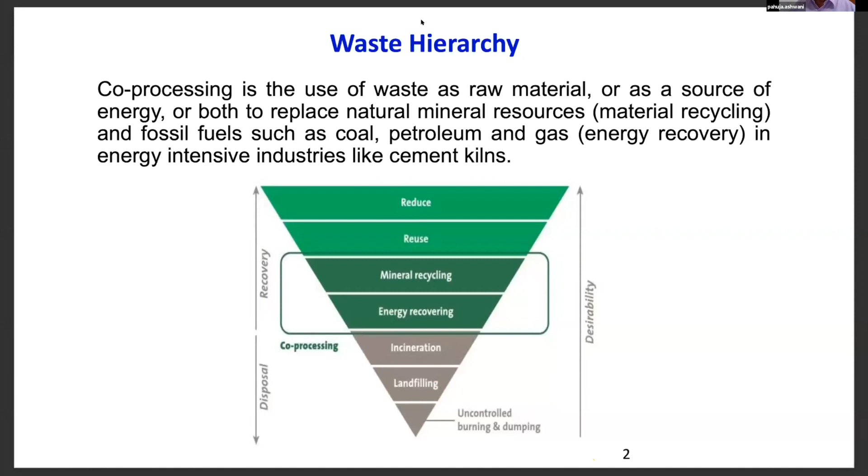Now, why is the cement sector used for co-processing of alternative fuels, particularly municipal and industrial waste? The main reasons are that the cement sector, having a temperature of around 1500 degrees Celsius inside the rotary kiln, provides a very high temperature, a very long residence time, and a very alkaline and oxidizing atmosphere, which results in destruction and removal efficiency of 99% or 99.9% of all the toxic elements.

And the ashes which are created during the combustion are also fully absorbed in the clinker structure. So there are no wastes as such. The clinker takes up all the ashes, which also increases the utilization of the ashes. And as a result, the complete scrubbing of exhaust gases also takes place.

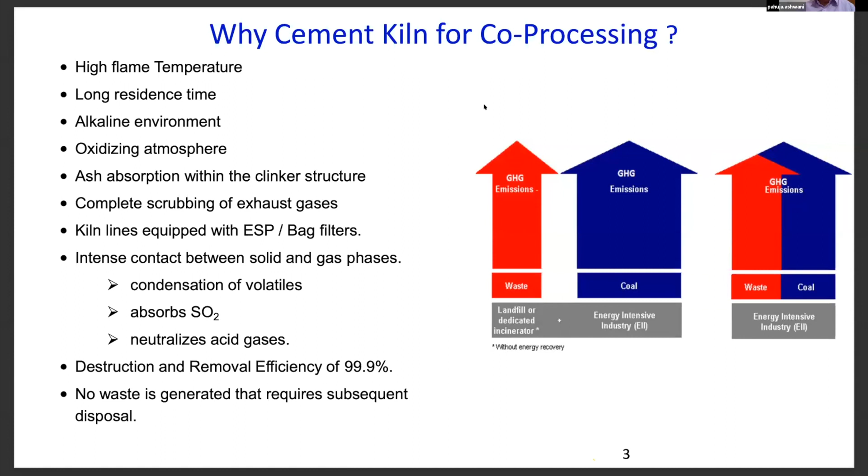Now, this utilization of alternate fuels in the cement sector started mainly in the early 90s, with only 2% alternate fuel thermal substitution in 1990 in the entire European Union. Today it has moved to around 48% in 2018, and currently it is close to 50-52% thermal substitution rate in the European Union. As against this, the Indian cement sector today is only at 4%.

Well, there are reasons, as I mentioned earlier, that there have not been very favorable policy drives, but in the last few years, it has started picking up.

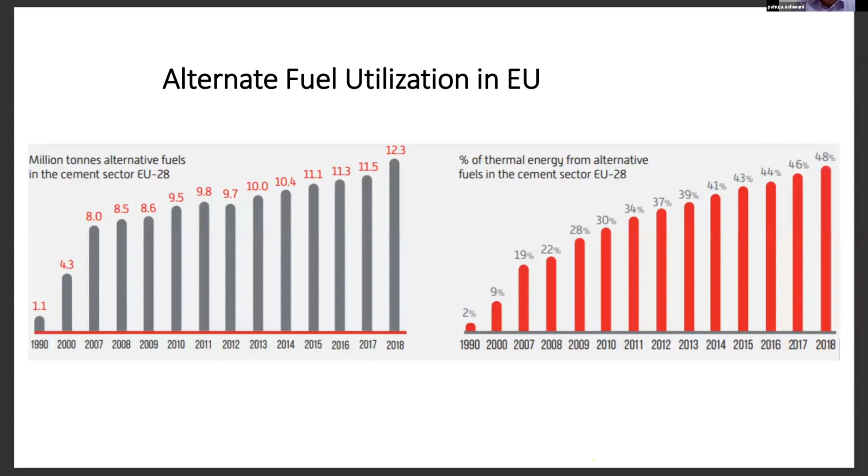Can we go to the next slide, please?

As we see here, for different countries, for example, in Germany, the thermal substitution rate is around 65%, and Germany utilizes nearly 3 million tons of alternate fuels. Whereas India has a production capacity almost 10 times that of Germany: Germany has a production capacity of 34 million tons, India 334 million tons. India stands at only a 4% thermal substitution rate. But as we see, nearly 1.6 million tons of alternate fuels is utilized.

So in terms of quantity it is fairly significant, not that bad a scenario, but in terms of percentage, because of the high capacity of the Indian cement sector, the percentages are low at 4%, and a lot remains to be done in the field of alternate fuel utilization enhancement.

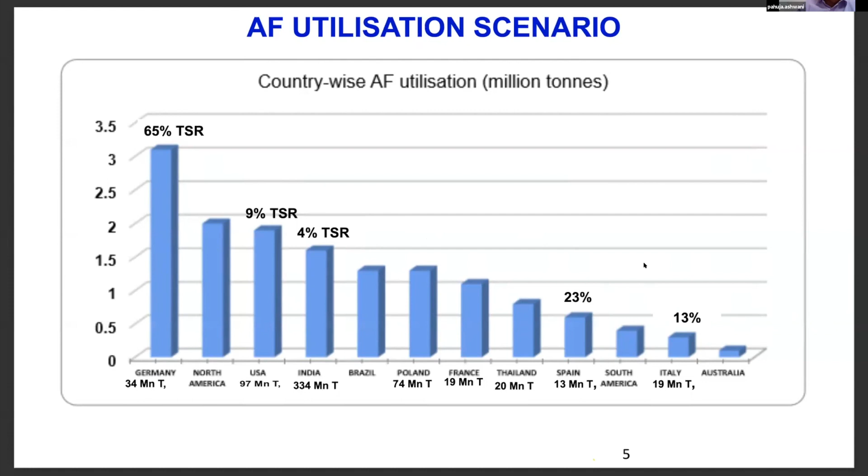Now, the main fuels of the Indian cement industry have been coal and petcoke. The alternate fuel utilization started in a small way at the beginning of the century, around 2001 to 2005, and remained up to 1% until around 4-5 years ago. Very recently, in the last 5-6 years, it has picked up, and today the thermal substitution rate has improved to nearly 4%. Various types of hazardous as well as non-hazardous alternate fuels, RDF, and plastic waste, etc., are being used by the Indian cement sector now.

Now, in terms of thermal substitution rate, I would like to mention that though 4% seems very low, the 4% thermal substitution in India is, in terms of quantity, equivalent to a 100% thermal substitution rate of Australia. So in terms of quantities, it's a very significant quantity, around 1.6 million tons of alternate fuels being used by the sector. Next slide, please.

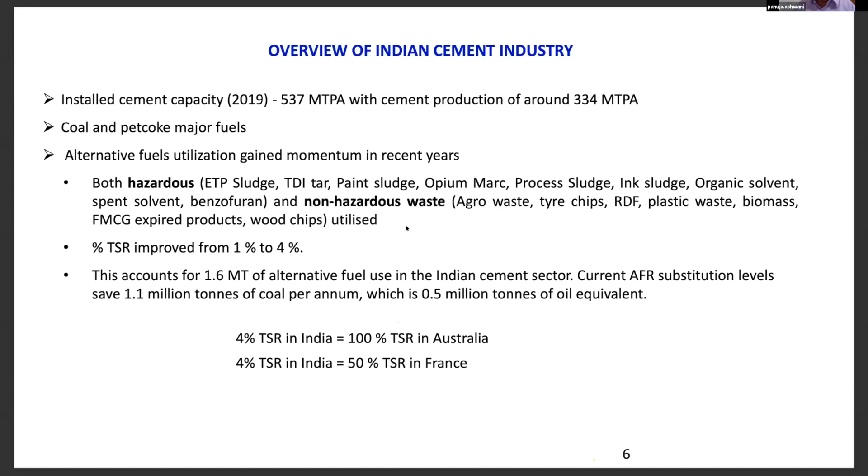Now, coming to municipal solid waste, which is the topic of the day, or RDF. In India, the municipal solid waste generation is very high, standing at nearly 65 million tons in 2018, and it is increasing at the rate of around 5% annually. That means today it should be around 75 to 80 million tons of MSW generated every year. And it is slated to increase to around 165 million tons by 2031. So the quantities are enormous, and as a result the potential is also enormous.

But the main factor here is that only nearly 20% of the MSW comprises the combustible part, and the remaining 80% is generally ashes and non-residual parts.

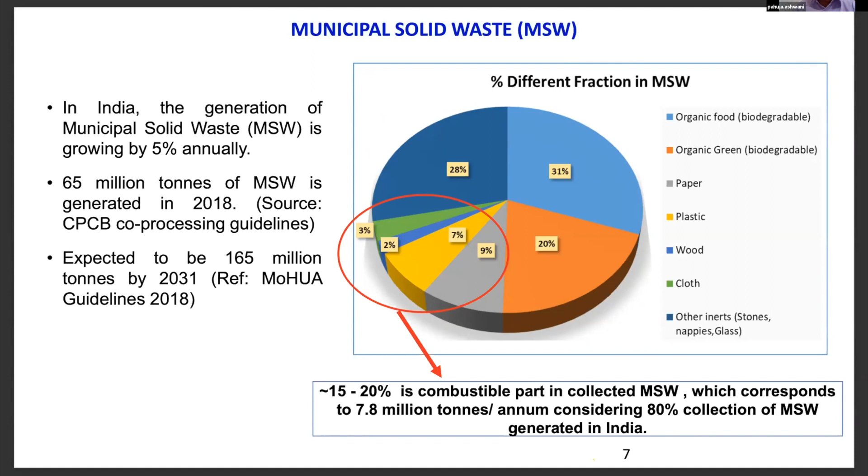Now, when we talk of the potential of alternate fuels in India, out of this MSW, 9.46 million tons of RDF can be made available currently as per 2018 data, and nearly 4.5 million tons can become available to the cement sector. Apart from that, there is surplus biomass availability in huge quantities of around 145 million tons per annum, which is largely either used by the renewable power sector or disposed of at the site itself.

Again, for hazardous waste, close to 7.11 million tons is available, out of which only nearly 0.71 million tons is available to the cement sector for co-processing. And for used tires, nearly 1.2 million tons is the availability. So in total, nearly 20 million tons is the likely availability of various alternate fuels in India, and we are currently using only 1.6 million tons.

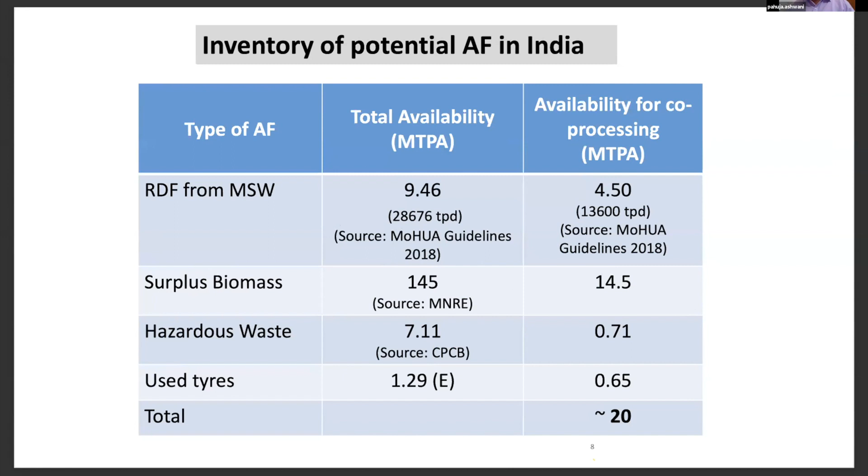Now, when we talk of RDF derived from MSW, Indian MSW is not very good in quality as compared to European MSW, because of the difference in living standards of the Indian population compared to Europe. As a result, the MSW has a calorific value of 1500 kilocalories per kg or lower, which after treatment can be converted to around 3000 to 3500 kilocalories per kg in the RDF.

Similarly, the moisture content is also very high. There is a lot of food waste in Indian MSW, because of which the biodegradables and food products are very high, and moisture content is also very high. And in terms of utilization, if the cement industry is able to achieve a thermal substitution rate of nearly 20%, it can result in utilization of about 9.5 million tons of MSW by the cement sector alone.

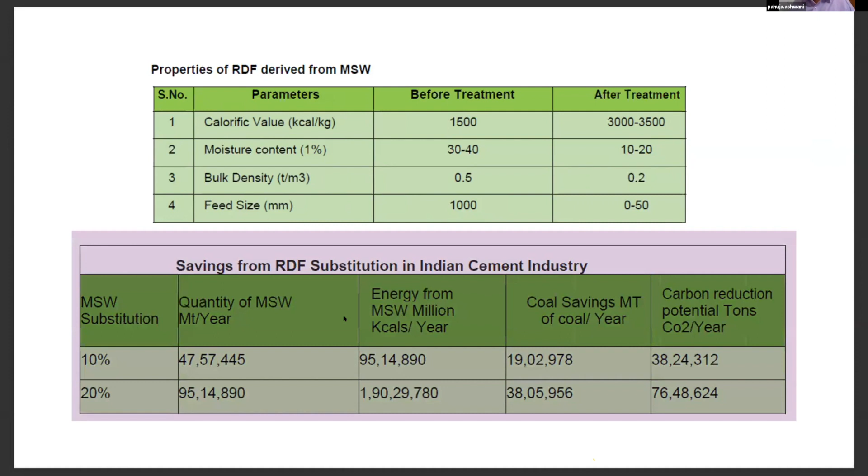But what we get is not exactly this. We get much poorer quality of RDF despite getting it pre-processed. So I'll share with you the actual values in a few later slides.

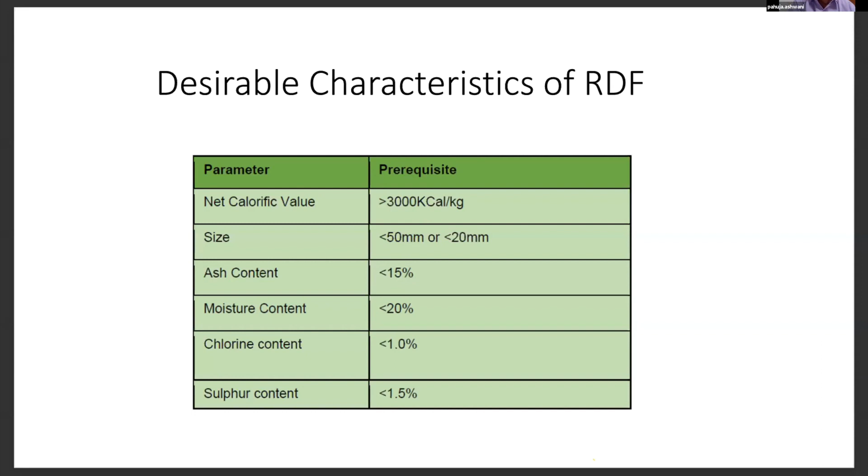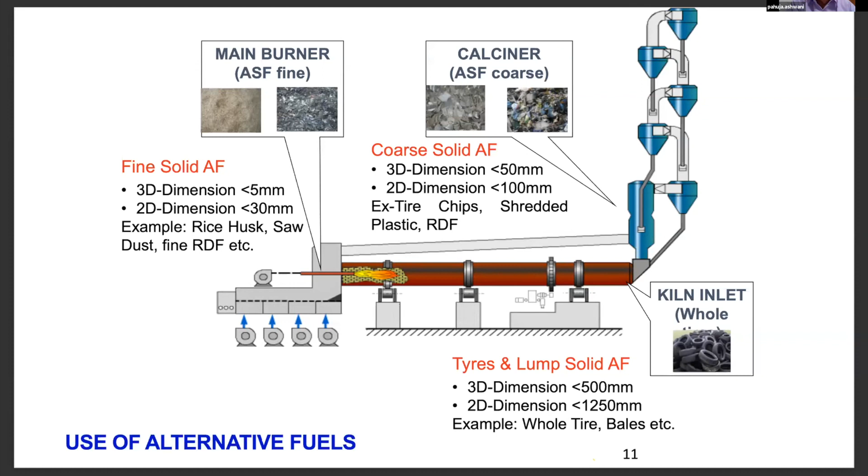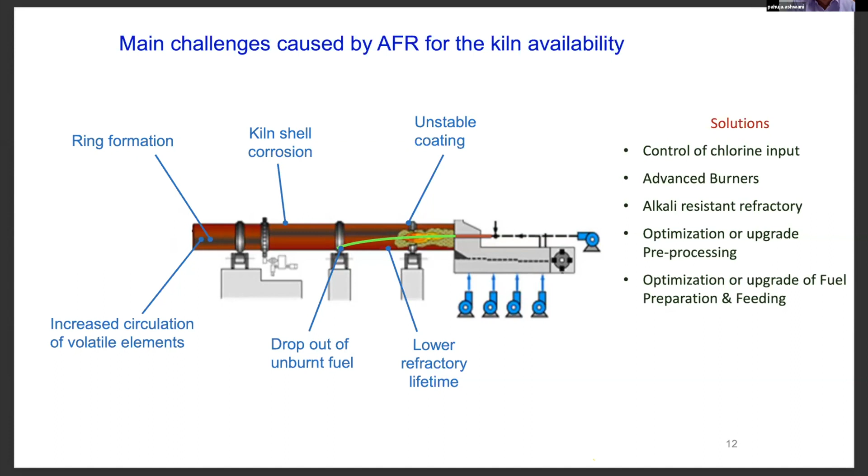While there are solutions for these, at the same time it results in additional equipment to be installed at the plants, a slight increase in heat consumption and a slight reduction in the production of the kiln because of increased utilization of these alternate fuels.

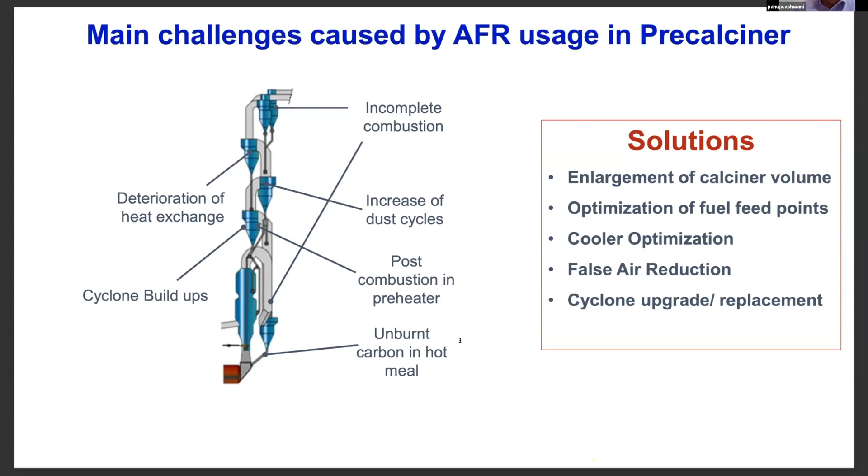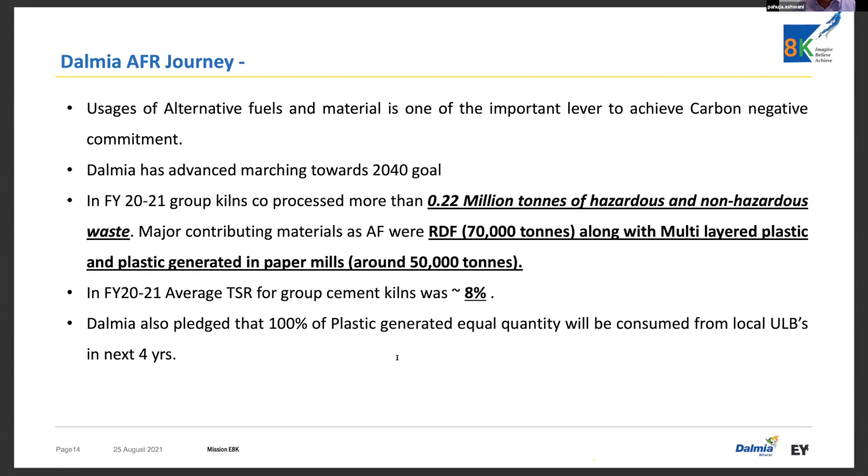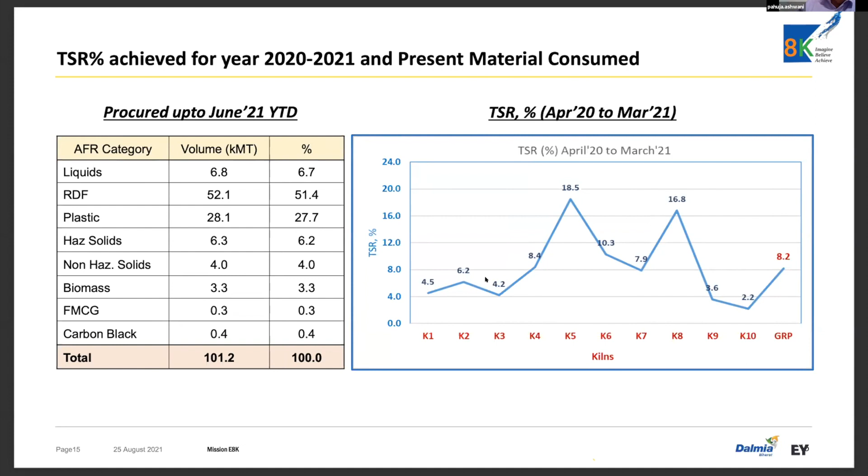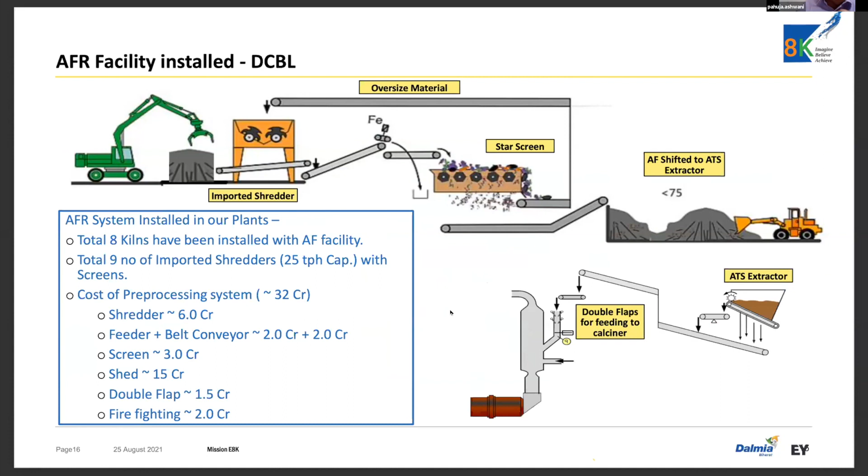We have got state-of-the-art facilities installed at our plants for feeding of the RDF, which have state-of-the-art imported shredders for reducing the size, proper screens for reducing the ash content, and also proper storage and feeding arrangements for proper feeding, as well as for minimizing the inconsistency in feeding, for proper control of the weight quantities of the alternative fuels. Next slide, please.

Now, from current level of 9%, presently we have a target of going to thermal substitution rate of around 35% by the end of 22, for which we are taking a number of actions, which include installation of additional shredders and additional feeding equipment. We are upgrading our preheater fans for handling enhanced quantities of waste gases from the combustion of alternate fuels. We are carrying out calciner modifications for increasing the retention time of the alternate fuels. We are also in the process of installation of chlorine bypass systems for enhancing the alternate fuels in our kiln systems. And the group target is for 35% by March 2022.

And beyond that, we have taken a target of becoming carbon negative by 2040, for which we have a target of switching over to 100% fossil fuel substitution, that means 100% coal and petcoke replacement by 2035, which will be a combination of various types of alternate fuels, particularly RDF, and also a large proportion of biomass, which will be specifically sustainably harvested bamboo, for which we are going to have a captive model of agroforestry for bamboo generation and bamboo plantation.

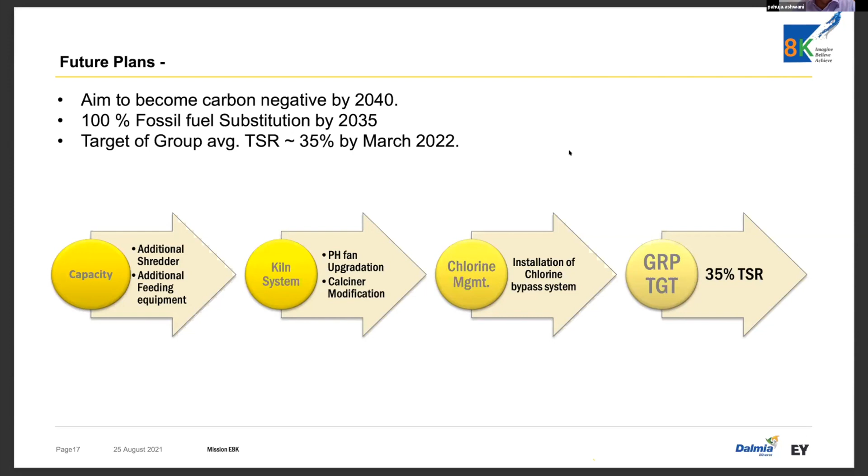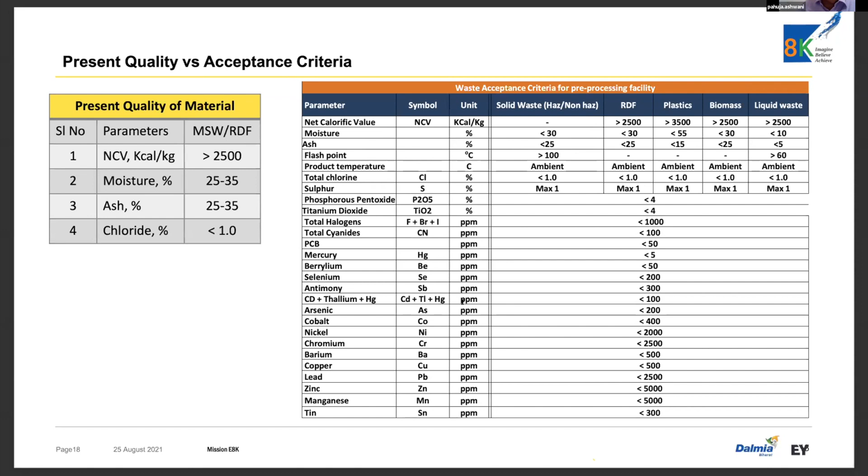So, as I mentioned, the qualities of the RDF are not as per our desire. We require less than 20% moisture, whereas what we get is around 25 to 35% moisture. Similarly, for ash we require less than 15%, whereas what we get is nearly 25 to 30%. So all these are creating process problems, as a result of which it's a challenge increasing the quantities of RDF in our kilns. Next slide, please. Can we go to the next one?

Yeah. So depending on the availability of alternate fuels, we can fairly conclude that we can very safely go to an alternate fuel thermal substitution rate beyond 25% in the next few years, but for which a regulatory push is required from waste generators as well as from government, which requires a balanced approach for market instruments as well as enforcement of policies for the polluter pays principle, and avoiding landfilling, so that the majority of the alternate fuels can be actually co-processed and not dumped in the sites. So with this, we feel that there is a big potential for enhancing the utilization of alternate fuels in the Indian cement industry. Next one, please.

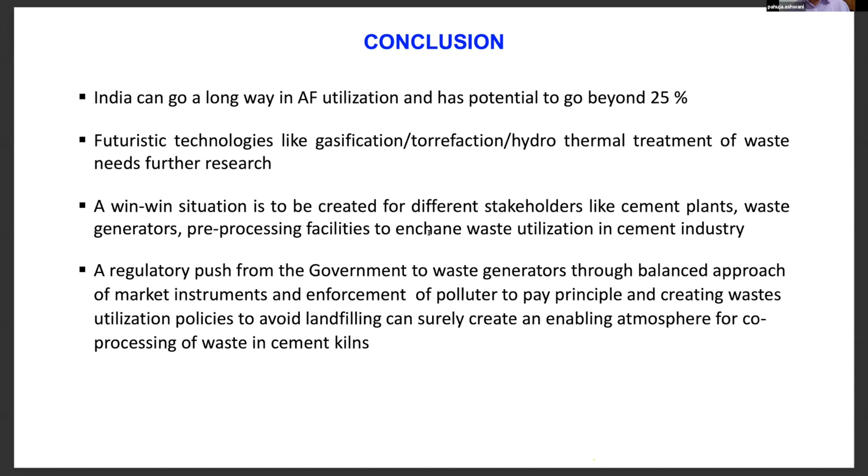So with this, I would like to thank you for your patient hearing, and any questions, I'll be very happy to answer. Thank you.

Thank you, Mr. Pahuja, for this really, really interesting presentation.

Before I start the question session, one remark to the other speakers. I think you can switch off your screen or your camera if you want to when you're not speaking, so you have a little bit more privacy.

Mr. Pahuja, one question regards the costs of RDF. What are the costs or the gate fees of RDF in general in India, and are there different costs for different types or classes of RDF? No, MoHUA has created 3 classes of RDF, but at present the industry is getting only 1 class, as you mentioned, because there are not a large number of pre-processing facilities created.

And again, gate fee also, most of the plants are getting virtually either 0 or they have to bear the transportation cost. So at the moment, the principle of gate fee has not picked up. That's why I mentioned that there is a need of a polluter to pay principle, so that if the gate fees are there, the industries will be able to create more or better pre-processing facilities for improving the quality of RDF, through which they can further increase the utilization of RDF for increasing the thermal substitution rates.

Ramky Environment is one of the leading waste management companies in India. I saw on your website, Mr. Mallick, you handle approximately 6 million tons per annum of MSW in 21 cities, and that is only the municipal waste and not the commercial waste. You personally oversee Ramky Enviro operations globally, and that of course makes you an expert in waste management in India. And you're also one of the advisors of the government of India.

And you will tell us a little bit about the production of RDF. We just heard that probably there is not enough production or pre-sorting facilities for the production of RDF. So, Mr. Mallick, thank you very much for being here today, and we're looking forward to your presentation.

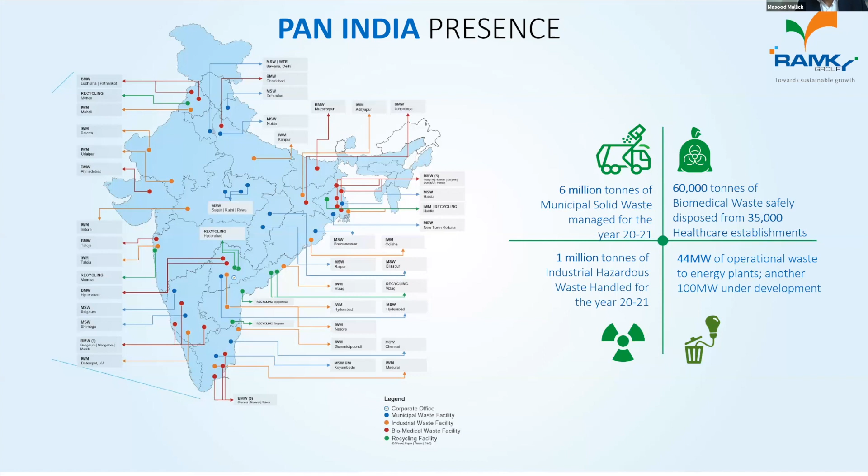There are very few parts of the country where we are not, and increasingly, whether it is Northeast or Jammu and Kashmir, both are places where we have made an entry now. We have a facility under construction in Jammu and Kashmir. We have actually 2 facilities under construction in Northeast. So those geographies that were not covered whilst this map was made a few months ago are now covered.

But that brings us to why all of us have come here today, which is to talk about the potential for RDF for municipal solid waste. Now, you heard all of these numbers. So let me just present the same numbers in a slightly different context. And the context is that irrespective of whether we are at 70 or 75 or 80 million tons today, everyone agrees that by 2030, our urban municipal waste generation, this is not the total municipal waste, will be 165 million tons per annum. It really dwarfs the 6-7 million tons that we currently manage.

This is the scale of the challenge. Yeah, I would say this is also the scale of the opportunity. This represents about 41 million tons of carbon emissions equivalent per annum in 2030. So it's not just an issue of solid waste, it's also the resultant carbon footprint associated with this solid waste.

Today, only about a fourth, 1 in 4 tons that is generated, is being processed and treated. And that's also a reality. Again, it highlights the scale of the problem, or maybe the opportunity, if one chooses to look at it this way.

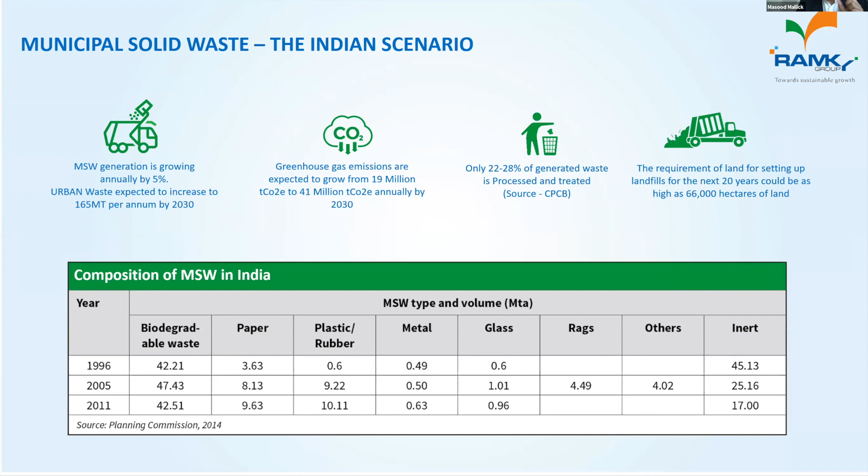This tells you that as an economy or a society evolves, matures, as income levels go up, consumption increases, the footprint of that increased consumption can be seen in the waste itself, not just in quantity terms, but also in composition terms. So it's not just the 5% growth rate that municipal solid waste has year over year. It is the combustible fraction, or the energy containing fraction, of waste going up year over year that is equally important for the discussion that we are having.

So I actually tried to do this little table for you, which uses 2012 data, where the last time CPCB confirmed MSW generation in the country as 62 million tons, and the anticipated 140 odd million tons in 2025. That's the rough number that we are at right now. What does it mean from an RDF potential standpoint only from MSW? Pahuja Saab touched upon many other forms of alternate fuel. I'm only talking about municipal solid waste.

And through a number of assumed factors, which is assuming a collection efficiency of 80%, which is more or less where we are today. Collection, not processing. Collection efficiency of 80%. We will collect 112 million tons per annum of this 140 million tons that we generate. Processing or treatment efficiency is only 25% right now. I'm assuming this is going to grow substantially. We are actually seeing a lot of growth in the processing space in the next few years.

I'm assuming that at 75% treatment efficiency, we will have 84 million tons of waste treated every year, which will, through a series of processing steps, represent about 13.5 million tons of RDF only from MSW. That has a very significant energy potential, etc. Not going too much into that, but I wanted to also present another set of facts. On one hand, very soon we'll be generating about 13.5 million tons per annum of RDF.

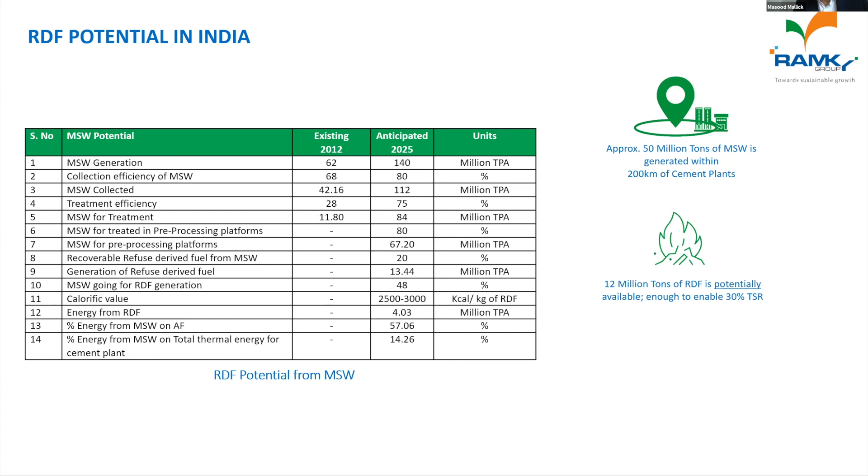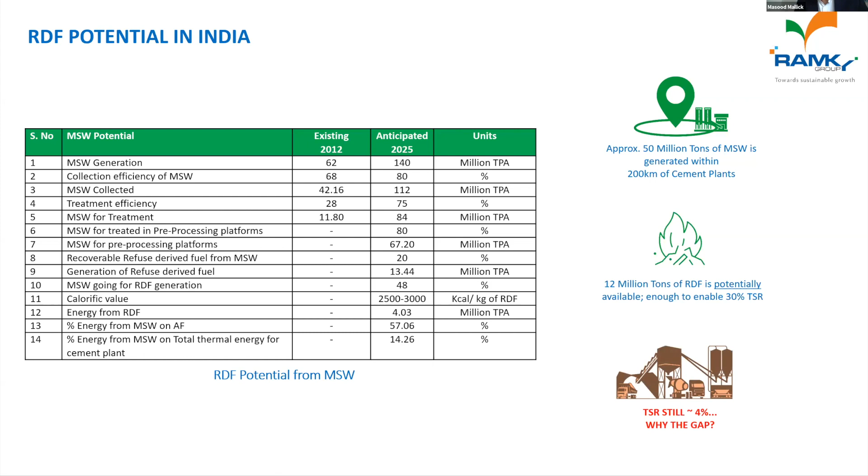And as he very rightly said, thermal substitution rate is still at 4%. Why the gap? And we'll talk about some of these gaps subsequently, but you can see the scale of the challenge, but I would also say this is the scale of the opportunity. The gap to potential, why? And very interesting that it's more or less these points that came up during the previous presentation itself.

RDF quality and consistency. Unlike coal, waste is not homogeneous. Waste is highly heterogeneous. And therefore, from a quality and consistency standpoint, there is a need for a significant amount of pre-processing. Like you mine coal and transport it and burn it, you cannot do the same to waste. It needs a lot of pre-processing.

The kiln or the calciner technology, I think there was a mention that some modifications are required to the kiln or calciner in terms of feeding arrangements and in terms of airflow to ensure that combustion is complete and therefore the entire heat value is recovered. If heat value is not recovered, not only is it a problem from an energy loss standpoint, it's also a pollution problem.

Cost and willingness to pay, a very, very significant factor. Now, if I take a step back, and forgive me for this comment, Pahuja Saab, today the Indian cement industry sees waste as a revenue line. RDF is a revenue line. It is not a cost line for the cement sector in India. It is one of the most efficient cement sectors anywhere in the world. The energy efficiency, the cost of conversion, the innovations that have happened in that sector, just amazing. Their own sustainability performance, just amazing.

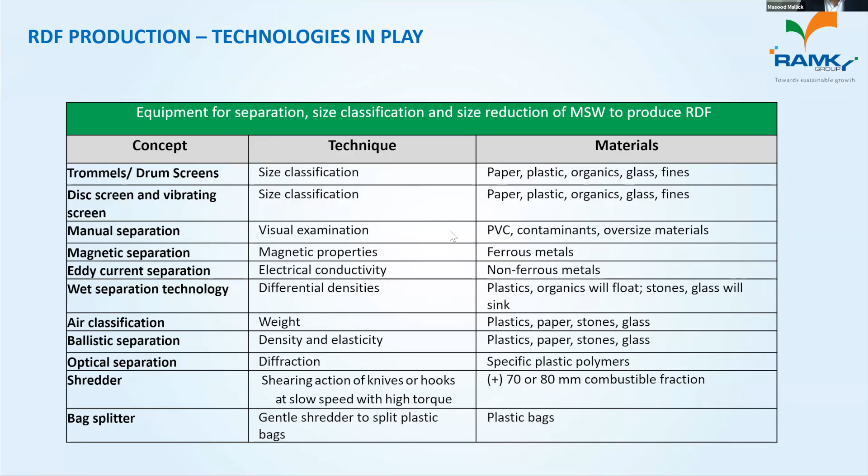Assuming that there was a willingness to pay for higher quality, higher energy density, then a second grade of RDF could be possible, where both in terms of homogenization and in terms of particle size, or the physical properties of the RDF, the quality could have been improved. And then even a third grade, which is much higher quality of fuel, is possible. So technology is no longer the barrier, ladies and gentlemen.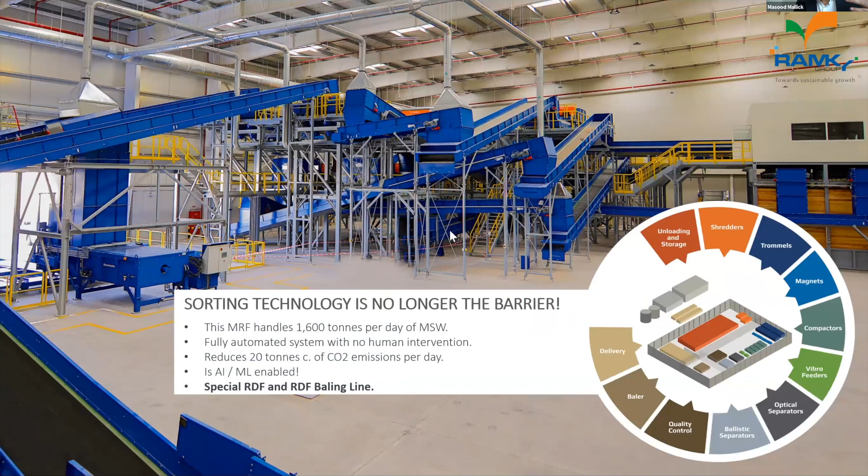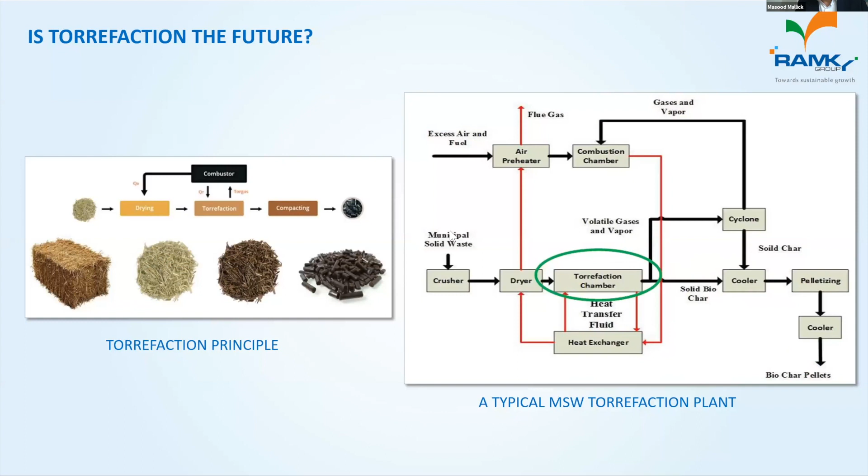In fact, Ramky, because it is not able to dispose all the RDF that is generated through this process, which is the MRF process, is investing in significant research, development, and innovation studies in torrefaction. And our idea is, can we move to a future where instead of making RDF using just physical sorting and optical sorting and shredding and sizing, can we go into thermal treatment, and can we go into other forms of processing required to convert the same RDF into green coal?

Mr. Mallick, may I also remind you to come to an end? Yes, it's just one more slide.

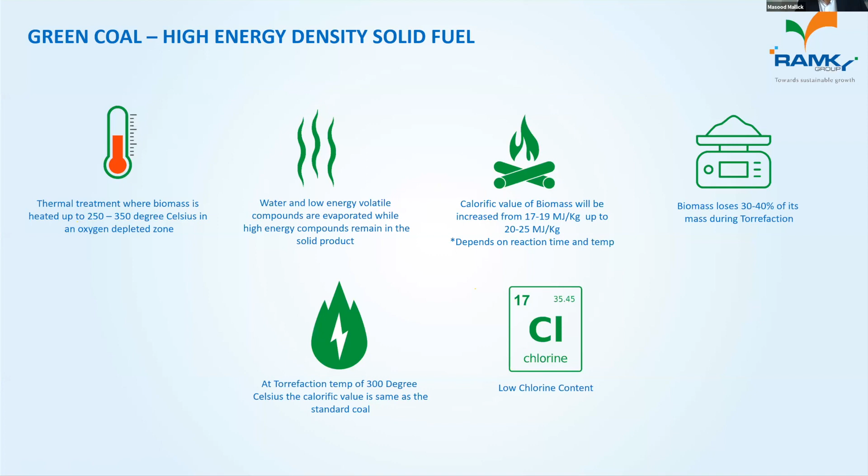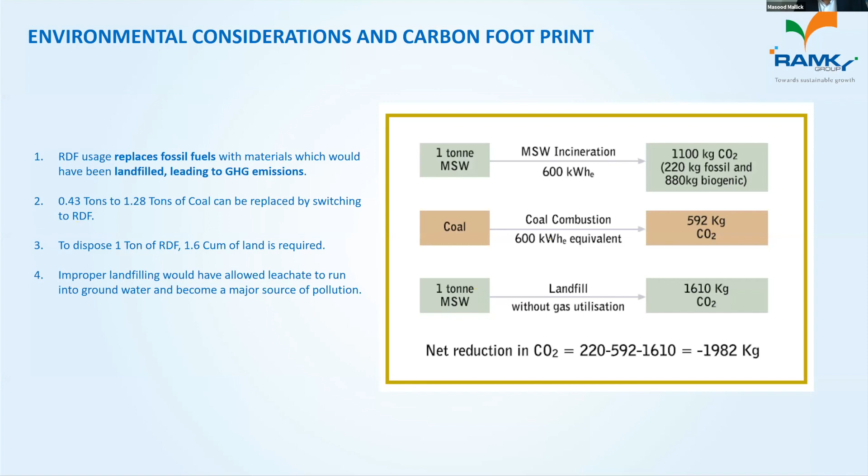So green coal, where much higher energy density, much better in terms of moisture content and low chlorine content, etc., as was being talked about. Again, it's a question of, if a cement company steps up and says, I have a demand for so many 1,000 tons per annum, for us to set up a plant and give them green coal is not a problem. I will not spend much time talking about the benefits of doing that beyond just the cost. Cost is definitely one factor, but the net negative carbon impact of switching away from coal into RDF is so significant.

So like China, which has 800 waste-to-energy plants, unless the cement sector comes up and other sectors come up, we will be forced to go down this road of having waste to energy and power generation using a very high capex model like this. I hope that will not be the case, because at the end of the day, optimum utilization of RDF in the cement sector is what delivering sustainability and delivering SDGs is all about.

We come to our next presentation, and one question was the share of manual work in this sorting process, which has always been some share still, even in the highest technology facilities I've ever seen. At the end, there are two guys running around with gloves and picking something out. So we come to this technology, and we just heard that the share of manual work is a very small one in the production of RDF, and it's all done, or mainly done, by machineries.

And we come to a company that produces such machineries, Vecoplan. Like our company ecoprog, it's based in Germany, in a fragmented market where we have a lot of suppliers. One of the large companies with a really global presence, and Mr. Maistry shows this global presence. He's the area sales manager, responsible for countries such as Saudi Arabia, South Africa, South Korea, Australia, New Zealand, and of course India. He has a degree in mechanical engineering from South Africa and is now based in the United Kingdom. He's an expert in metal and waste recycling equipment such as shredders, shears, and balers, and has designed, built and commissioned recycling facilities in different parts of the world.

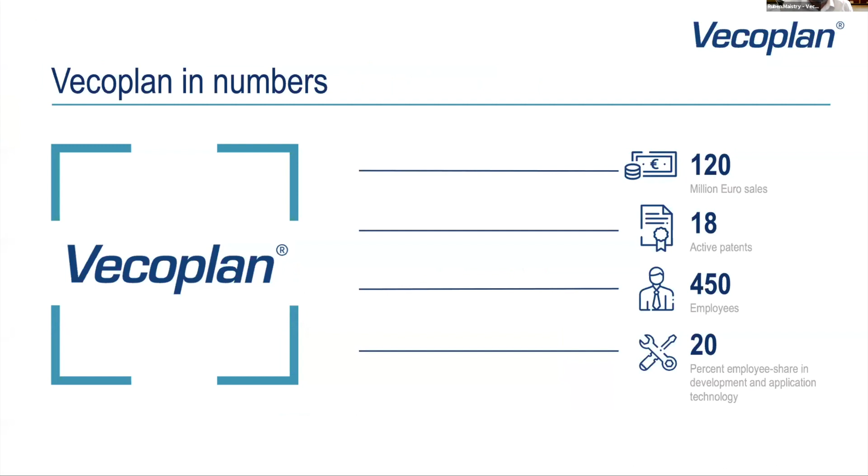I'd just like a few minutes to give you a brief overview of Vecoplan. We have over 120 million euros of global sales, 18 active patents, 450 employees worldwide, and a 20% employee share within the business. Our head office is based in Germany in a place called Bad Marienberg, approximately 1.5 hours from Frankfurt. A lot of manufacturing comes out of this facility in Germany. We also have offices in the UK, Austria, Spain, two in the United States, Poland, and Switzerland. Next slide, please.

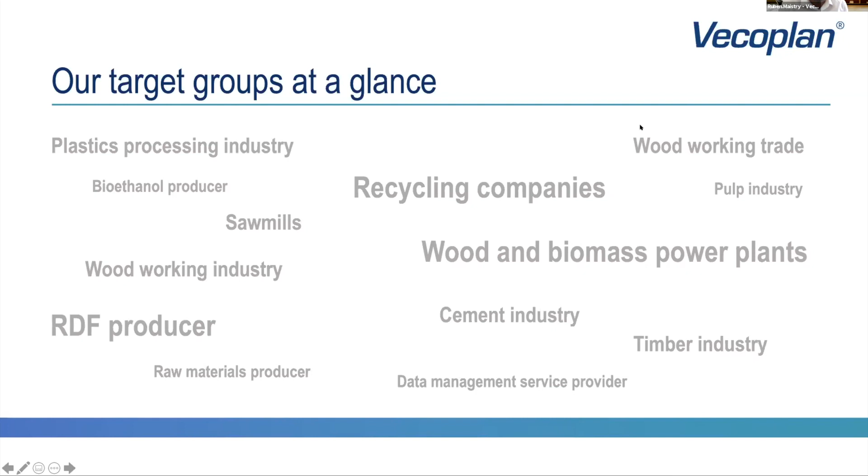Reducing fuel costs and cutting down on CO2 emissions are the top requirement for the cement industry and its production, therefore resulting in the following materials as alternative fuel sources. So as my previous two speakers have mentioned, MSW, bulky waste, commercial and industrial waste, tire chips as well is quite important, wood waste, textiles, hazardous material, biomass, and other rubber products.

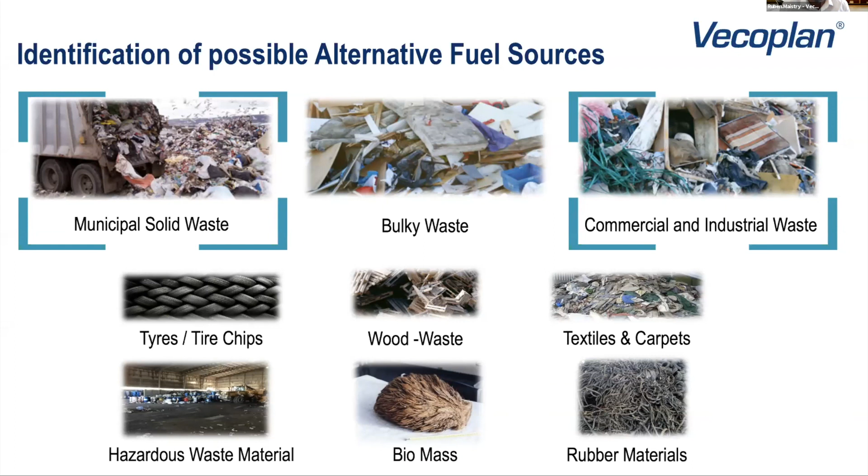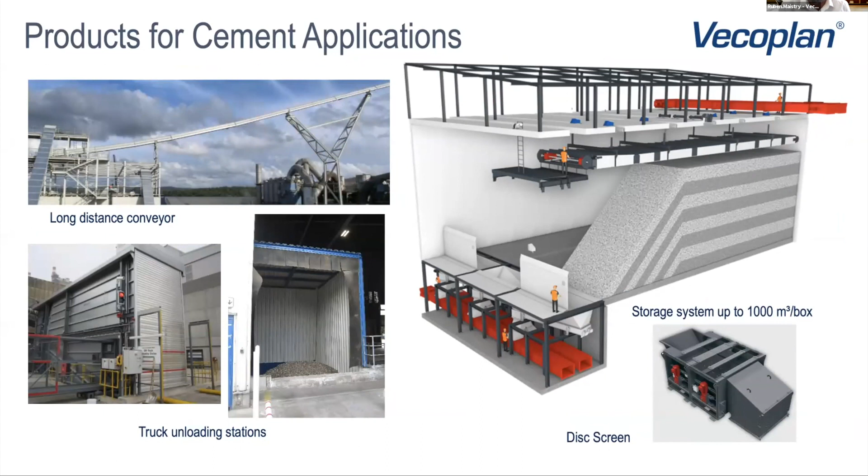So as a company, we can offer products that are necessary for the cement applications. Within the slide and in the next one after this, can be seen a few of our products that are relevant for cement application. We specialize in conveyors, loading stations, storage systems, the screens.

This slide that's currently present, if you just go up one, please, Afran. Thank you. Within this slide, as we can see, is some of our existing installations within the cement industry, where we've either installed conveyors, loading for trucks, and various other components.

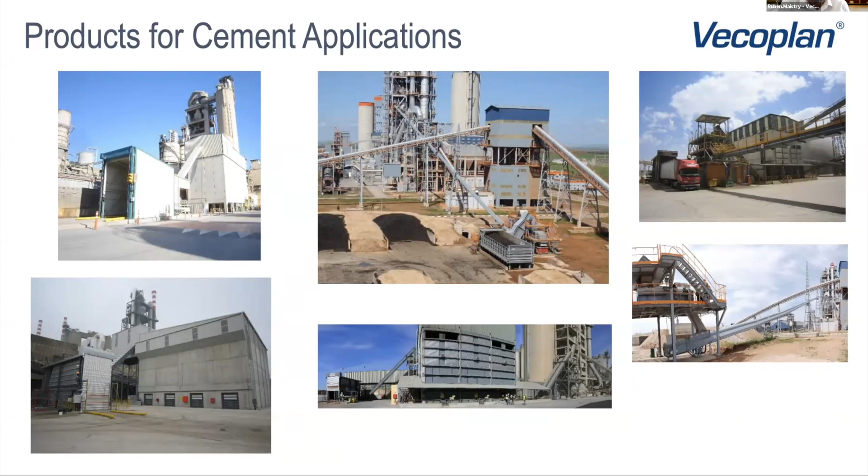Next slide, please. We do have a vast product portfolio, and this consists of the following technologies that we can offer our clients for a turnkey solution. So we specialize in shredding equipment, conveying equipment, storage equipment, separation technologies, screening, and the dosing systems required for plants and cement industries.

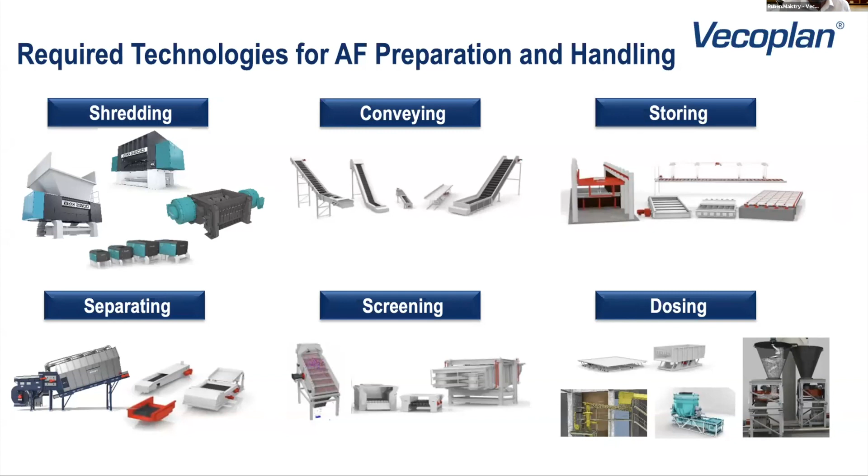Next slide, please. The most common shredder that we supply to the cement industry is our VEZ 2500 or slightly bigger unit known as the VEZ 3200. We can produce material down to 50 millimeters or 30 millimeters as required for the cement industry. It's designed so it can be used as a pre-shredder or single-step shredding.

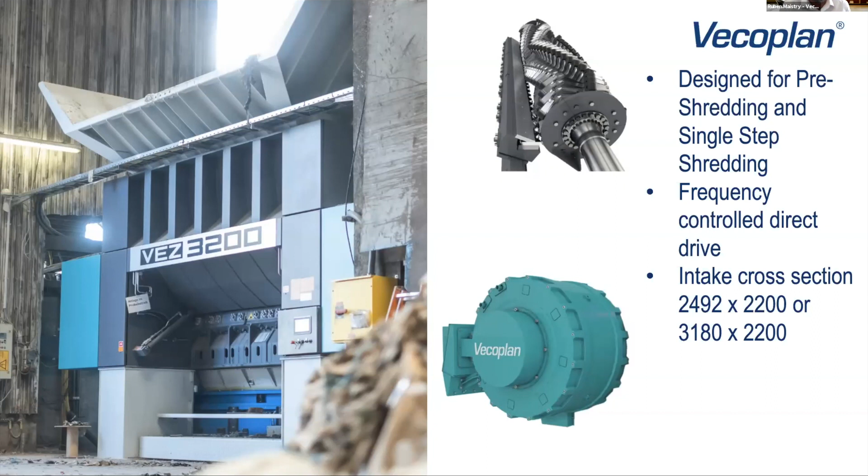It has a frequency controlled drive, and the intake cross-section, depending on the size of machine, is just less than 2.5 meters by 2.2 meters, or just less than 3.2 meters by 2.2 meters. It's of a single rotor design capable of shredding all types of waste, either loose or in bale format. Next slide, please.

Our moving floor bunkers, as can be seen within this slide, have a volume of from 20 to 480 cubic meters. They can be easily disassembled into the individual modules, allowing for easy transportation in a standard ISO container. Just to mention as well that with our moving floor bunker, the floor is almost like a step arrangement hydraulically. So what that does is it actually moves the material forward by allowing the floor to move.

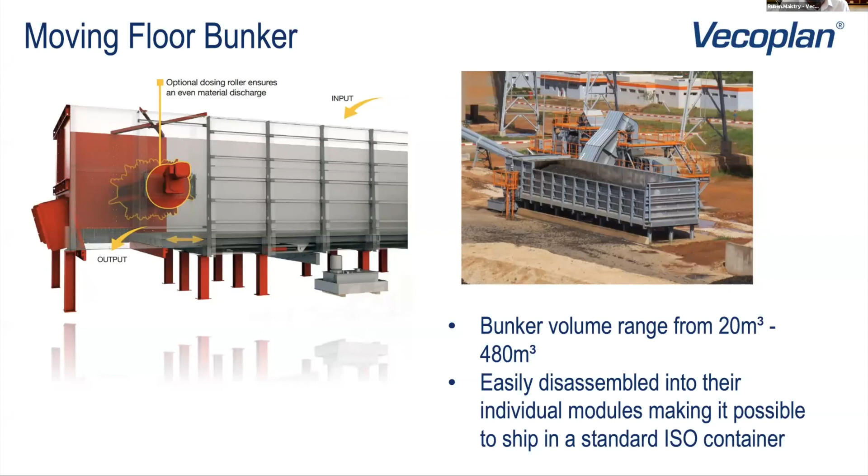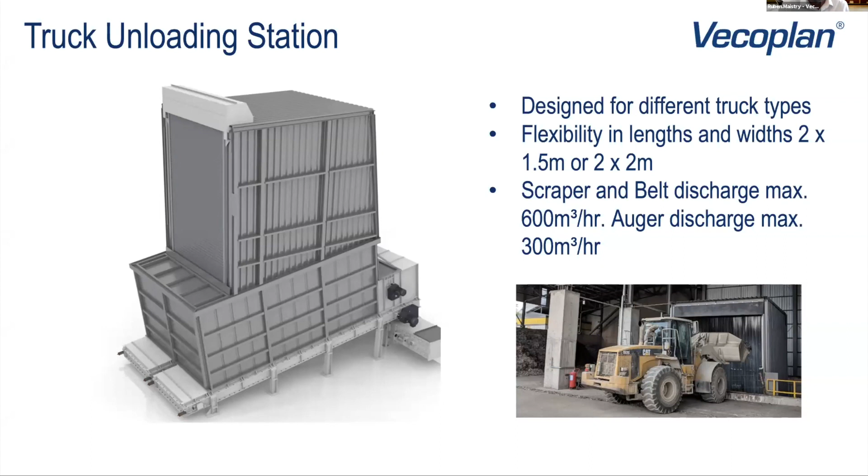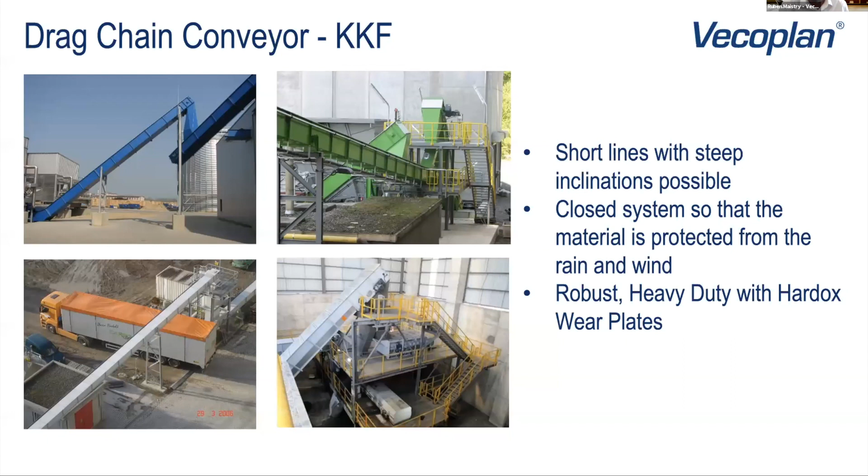To cover a wide range of material handling requirements, Vecoplan designs and manufactures conveying units to meet a wide range of requirements, such as the type of material and particle size. Our chain conveyors can be fitted to short lines with a steep inclination. Our system is closed, protecting material from the rain and from the wind. They are also heavy duty and robust, made out of Hardox wear plates.

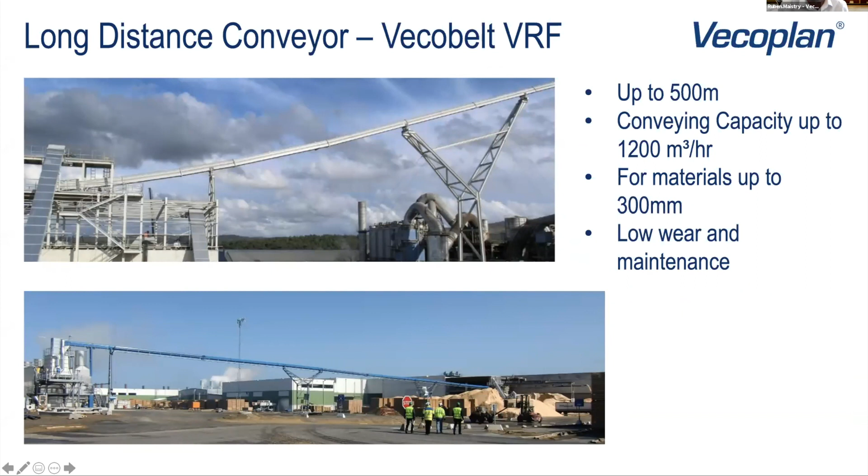Sorry, yeah. One of our signature products within the Vecoplan portfolio is our air-supported Vecobelt, which can be supplied for longer distances up to 500 meters, conveying a capacity of up to 1,200 cubic meters per hour. If we can go to the next slide, please.

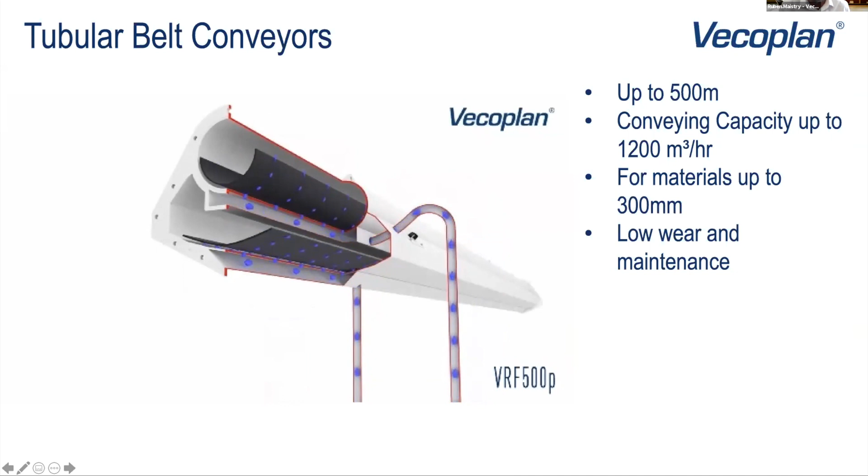This illustration gives you an idea of how our Vecobelt works. We have air from blowers feeding the bottom of the conveyor belt along with the other half of the conveyor belt. As you can tell, by air being introduced to the system, this allows the belt to move without the use of any rollers, resulting in low wear and low maintenance costs.

So next slide, please. With regards to our Vecobelt, we can offer them in 3 different sizes with a speed of 2.5 meters per second. Smaller size being a belt width of 500 millimeters, and with the larger size being a belt width of 1,000 millimeters.

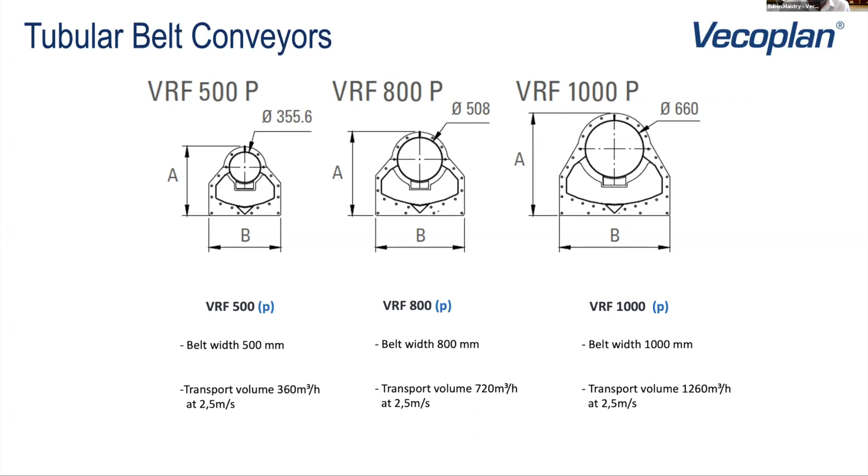We also manufacture storage systems, which have a capacity of 1,000 cubic meters per box, and are capable of loading and unloading. With our system that we have, it is a possibility to blend materials that may be required for your relative industry.